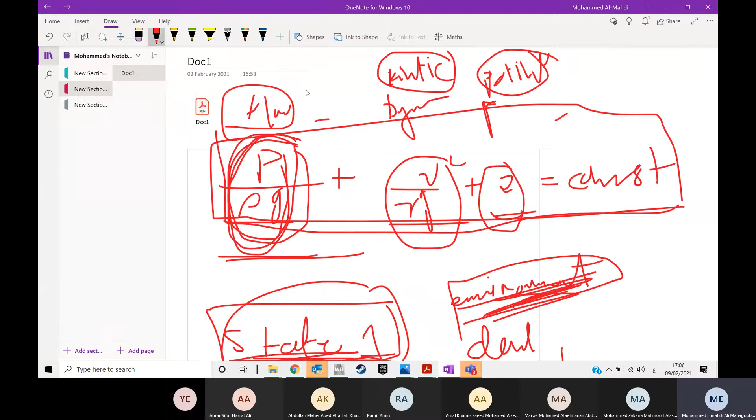Then in chapter 3, you learned about the phases and how to read the tables. You have the saturated liquid state, saturated mixture state, and saturated vapor state. And beyond these you have 2 states: the superheated state and the subcooled state, and you know how to get them from the tables. If you have a fixed temperature and the pressure is more than Psat, then you have a subcooled liquid. If it's less, you have a superheated state. If you fix the pressure, then it's the other way around with temperature. And if you have another property besides temperature or pressure, like enthalpy, entropy or internal energy, you can define if that state is in the saturated mixture region from the quality x.

Then in chapters 4 and 5, you took something very important, the closed system and open system devices. These you are going to see in every chapter from now till chapter 14. So what are some of the closed system devices? The rigid tank, and the piston cylinder device. In the rigid tank you have a constant volume, because it's a closed tank. In the piston cylinder device, the piston moves and gives boundary work, and it controls the pressure inside the chamber, so the pressure is constant. These are the closed devices you took.

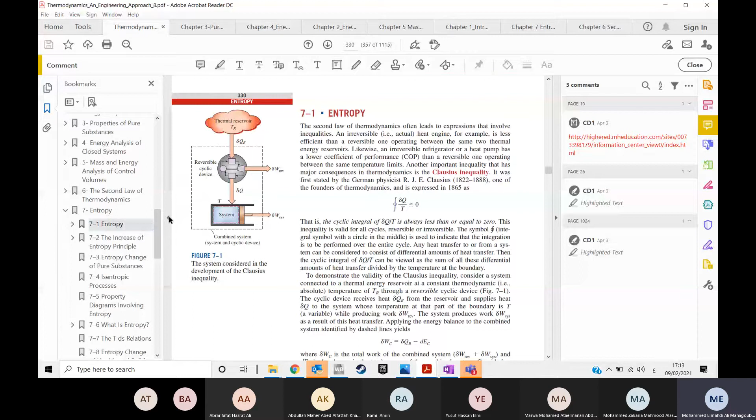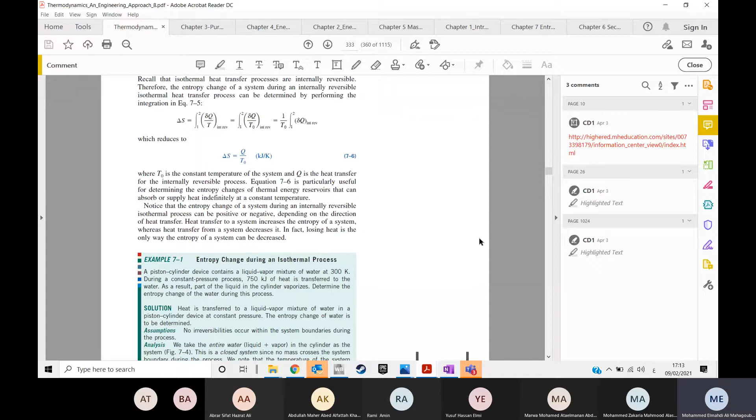So we have a piston cylinder device that contains a liquid vapor mixture of water at 300 Kelvin. During a constant pressure process, 750 kilojoules of heat is transferred to the water. As a result, part of the liquid in the cylinder vaporizes. Determine the entropy change of the water during this process. So we just want to calculate the entropy change of water in this simple process.

We don't have any mass in or mass out because obviously it's a closed system. And we don't have work, and even if we have work, it doesn't matter for entropy because we don't have entropy coming from work. So the only things that produce entropy are the heat and the mass, remember them.

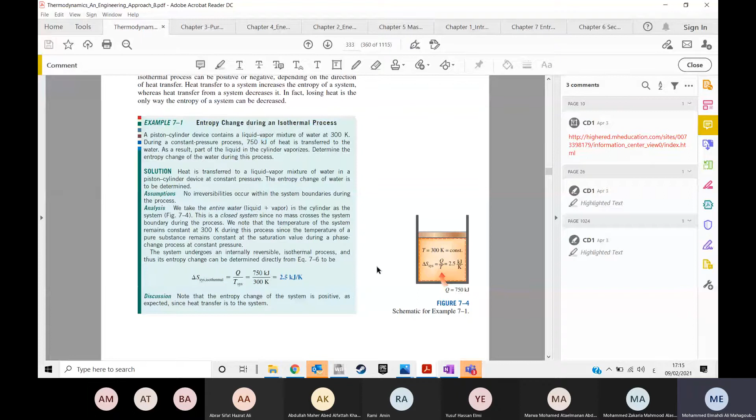So we only have this amount of heat transferred to the water, and we have the temperature of the boundary. Then the change of entropy will be Q over the temperature of the boundary, which is the same as the temperature of the system because it's at a constant temperature. Then 750 kilojoules over 300 kelvins will give us the change of entropy of that system. This is a very simple one.

Okay, this one is also related to it, just substitution of the equation of Q over T for the entropy coming from heat. We have a heat source at 800 Kelvin that loses 2000 kilojoules of heat to a sink at 500 Kelvin. This is the temperature of the sink, and this is the other temperature of the sink. So we have two temperatures for two different sinks. This is case A, and this is case B.

A heat source can be like a furnace or a boiler or anything, and these are the heat sinks where it's basically rejecting the heat that's coming from the source. So we want to know which heat transfer process is more irreversible. How can we define the irreversibility? The irreversibility was coming from this term that I talked about, the entropy generated. This is the entropy generated term.

But isn't there any difference between irreversibility and randomness? Irreversibilities and randomness. Now, the randomness or the motion of the molecules is related to the entropy, and if we have irreversibilities, they are part of the entropy, but they are not the whole thing. They are just some of it. You got me?

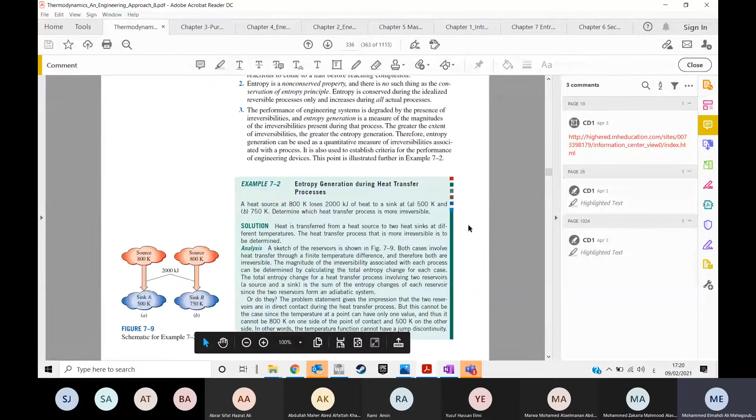For the sink, the heat will be in, so it's going to the boundary of the system. And for the source, the heat will be out. So here the heat will be negative and here the heat will be positive. Negative for the source and positive for the sink. And it's the same amount of heat, 2000 kilojoules, with different temperatures, of course.

Now compare those two systems with different sinks, the one with the 500 Kelvin sink and the one with the 750 Kelvin sink. Whichever has more entropy generated will be the one with more irreversibilities. We can know that without calculating, because this is a heat transfer problem, and the temperature is going from 800 Kelvin to 500 Kelvin. There are way more ways for the losses to happen from 800 to 500 Kelvin than from 800 to 750. And if you have this at 800, then you will not have any heat transfer, which means you have zero losses in this case.

So when we have a bigger gap between the temperature of the source and the temperature of the sink, we can expect, of course, more irreversibilities to happen and more entropy generated from our problem. But we just wanted to do it in the equation so that you get the hang of it. These are very easy. There is no mass, there is nothing, just heat. And you have only one system. It encloses everything, so you don't have entropy in or entropy out, just the generated entropy.

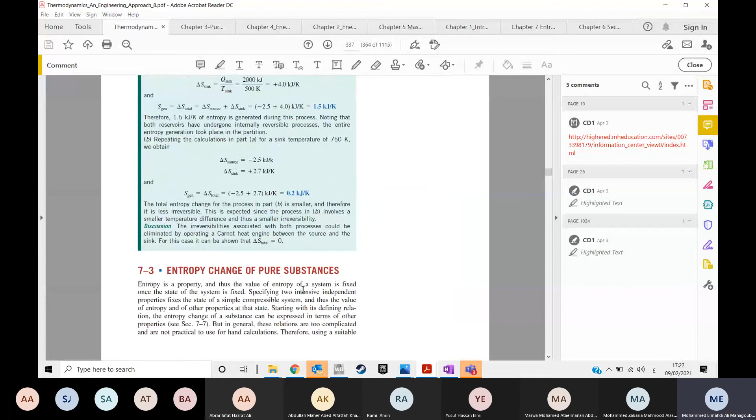Do you have any question till now? Okay. Yeah. Now we're having some systems, okay?

We have a rigid tank that contains 5 kilograms of refrigerant 134A. And this refrigerant is initially at 20 degrees Celsius and 140 kilopascals. The refrigerant is now cooled while being stirred until its pressure drops to 100 kilopascals. Determine the entropy change of the refrigerant during this process. So we want to know the entropy change of the refrigerant in this process.

Of course, we will always resort to our entropy balance equation. And remember, entropy is not like energy, so it's not conserved, okay? And it can be created or destroyed, okay? Or let's say can be created from the entropy generated. Entropy generated means that you are now creating some entropy that's not transferring from another source.

In the energy equation, you had the change of the energy of the system, and then the energy in minus the energy out. So we are not creating any energy, and we are not destroying any energy. If there is any energy lost from your system, then it's going to be lost to the surroundings, to anywhere else, but it's just changing its form, okay? And also there is no energy that's going to be destructed.

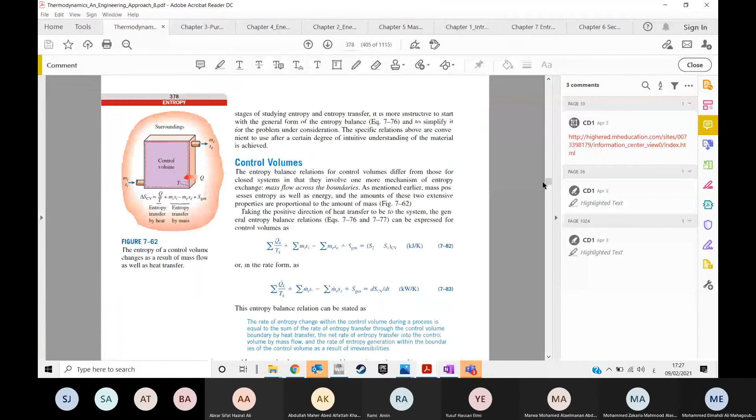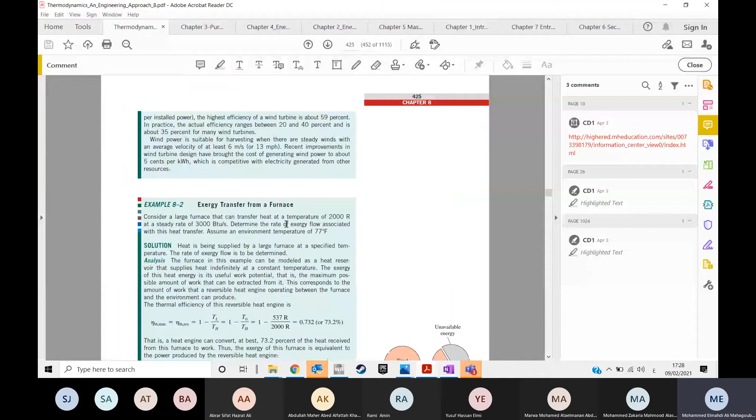So if you have mechanical energy, then this mechanical energy, or this kinetic energy, which is a form of the mechanical energy, will all be transferred to work, which is the same as the exergy. So here you just put equal to x. Okay, this amount of kinetic energy is the exergy that you have.

Okay, and this is the chart that I told you about. This is the total energy, and this is the exergy, which is the useful part, and this is the unavailable energy, the one that cannot be used in nature. Then if you don't have any losses, you don't have any exergy destructed. If you have some losses, maybe because you have other forms of work other than the mechanical energy, or heat transfer or any other irreversibilities, then you are going to have some exergy destructed.

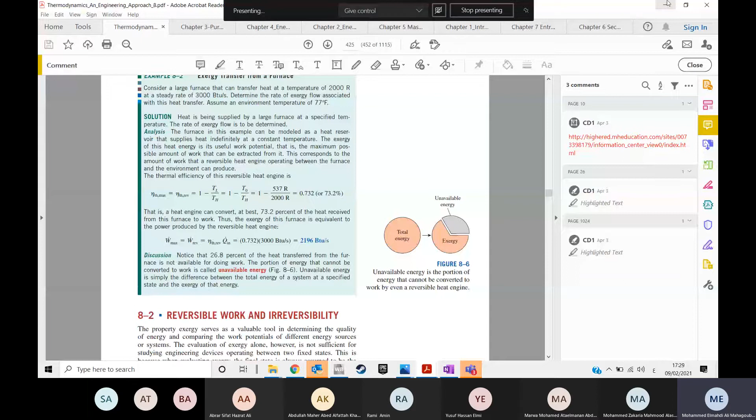So this is the difference between entropy and exergy. Entropy does not relate that much to work, but exergy is deeply involved in the work. When you reach that part, you are going to deal with the three equations. That's why it's important that you know everything so far, because some problems in exergy require solving from the beginning, and you have like three unknowns. You solve the first unknown from the energy equation, the second from the entropy equation, and then you go to the exergy equation. Not all problems, but some have this technique. Okay, let's go back.

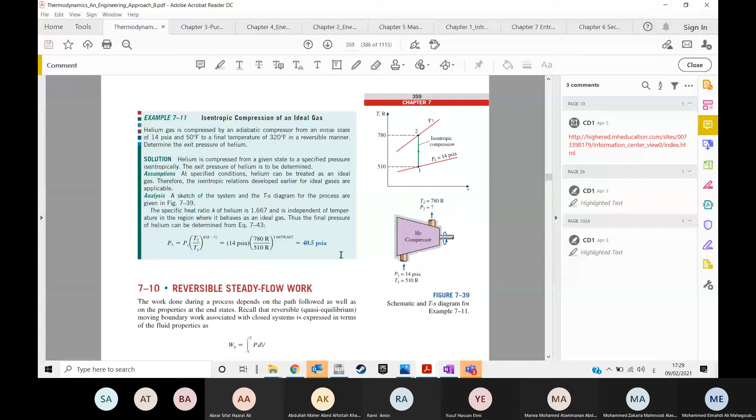Sorry guys if some of you feel like this is a bit boring, for those who maybe took entropy in thermodynamics, but I guess most of you didn't, so we are doing this part.

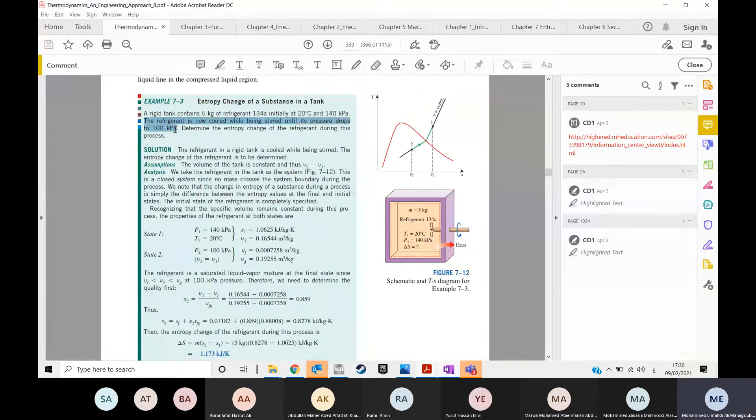Okay, now determine the entropy change of the refrigerant during this process. The change of entropy of the system, this is a closed system, equals the entropy in minus the entropy out plus the entropy generated. Will we have any entropy generated in this process? There is some kind of heat transfer. The refrigerant is cooled while being stirred until the pressure drops to 100 kilopascals. So you have some heat losses, then you are going to have entropy generated.

But you don't need to solve the problem from this side. You just solve it from this side because he is asking for the change of entropy in the system. If you have everything on this side, no need to go to the other side because there is an unknown there. Maybe you have the entropy in and the entropy out, but you don't have the generated part. So the change of entropy in the system is S1 minus S2 or S2 minus S1.

What was the first state? It's a refrigerant, so you grab the tables A11, A12, A13 that you have, and see what state you have at state 1. This is from chapter 3. And what state do you have at state 2? Then from that you can get the small s, the specific entropy, and say the change of the system equals the mass multiplied by the specific entropy of state 2 minus the specific entropy of state 1.

Of course, you can make it 1 minus 2 or 2 minus 1, depending on what change you are calculating, how it was and how it got to, or in the reversed order. Just be consistent. So at state 1, we have the pressure and the temperature. The entropy can be got from table A11.

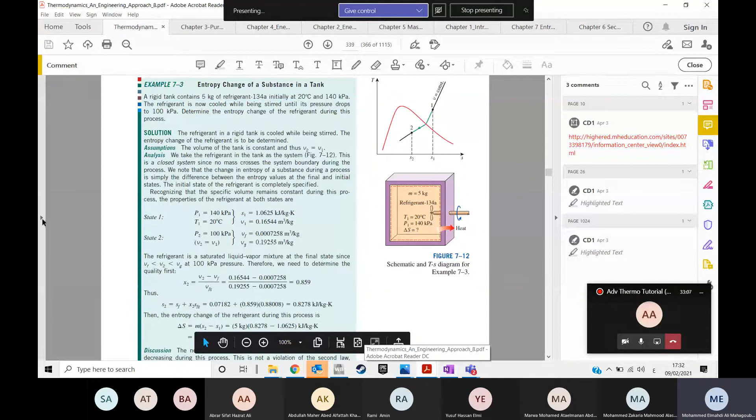Please keep the tables in front of you so that you can follow. I will try to open the tables. It's locked off. Okay, we can open it from here. Bookmarks.

Remember, we had 20 Celsius and 140 kilopascals. Is the pressure lower or higher than PSAT? It's lower than PSAT. So if our pressure is lower than PSAT and we fix the temperature, we know the state will be superheated, because the pressure is lower. So we go to table A13, to the pressure and temperature that we have, and get the specific entropy. This is, I guess, 1.0625. Okay, so let's go to the problem.

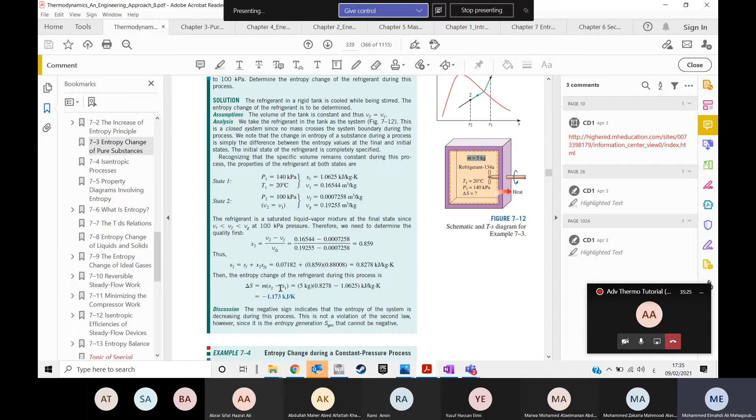Okay, so get the volume, and now fix the volume, because obviously you have a rigid tank, and then you can get the properties. Okay, it turned out to be a mixture, because it's between vf and vg. So now you can calculate x and therefore calculate s2. The mass of this system can be either given, or maybe you are asked to calculate it. If you have not a water or refrigerant system, but a gas system, then you can calculate the mass from the ideal gas equation. Okay, then that's the change of the entropy of your system.

I think it's simple. Do you get it? And obviously we didn't account for the shaft work because there is no entropy generated from work. Okay.

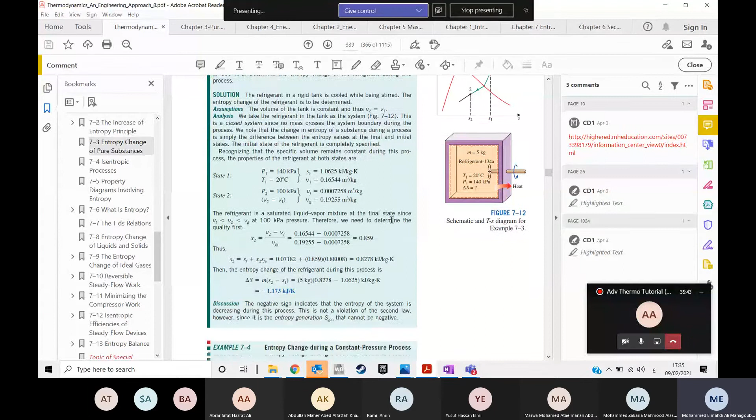The same thing will be applied to open systems. So this is an open system problem that we have. We have a steam turbine, and we are asked to calculate the output work of the turbine per unit mass of steam. Okay. Obviously, we cannot get the work directly from the entropy equation because there is no work in the entropy equation, only heats and masses. But what can we do in this problem?

We know from the statement that the steam enters an adiabatic turbine at 5 megapascals and 450 Celsius and leaves at a pressure of 1.4 megapascals. Determine the work output of the turbine per unit mass of steam if the process is reversible. When you see that the process is reversible and adiabatic at the same time, then it's isentropic. Why? If it's reversible, then you don't have any entropy generated. And if it's adiabatic, then you don't have any heat interaction.

Okay, so this is your system. When it's reversible, this means that you don't have any entropy generated. And when it's adiabatic, this means that you don't have any heat interaction, neither in nor out. I know that if you have heat, by definition, you are going to get entropy generated. But if you have both statements, then it's assuring you that you do have an isentropic problem. Okay, you will have the change of the entropy of the system equal to 0 when the problem says that it's reversible and adiabatic at the same time.

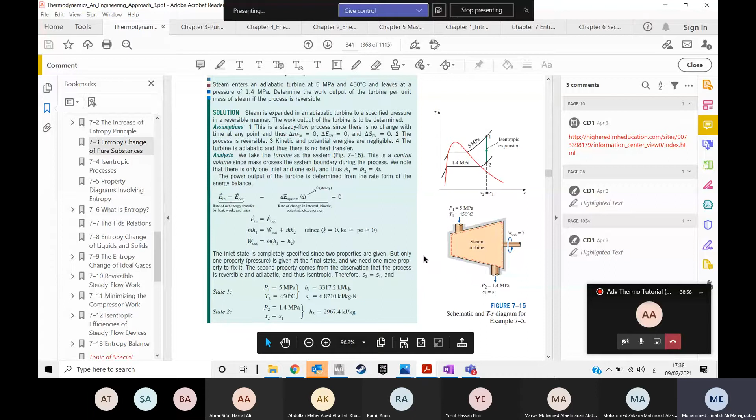And if I know the state at 2, then I can calculate the work out using the energy equation, not the entropy equation. You can use the exergy equation, but you're going to complicate it on yourself. The energy equation is easier. Okay. It's just direct substitution at the end. If you have S2, then you have H. You know that in open systems we go for H, not U, when dealing with energy. Then the difference in the H's is the work out per unit mass. If you have the mass, you can multiply by it to get the amount of work actually produced by the steam turbine.

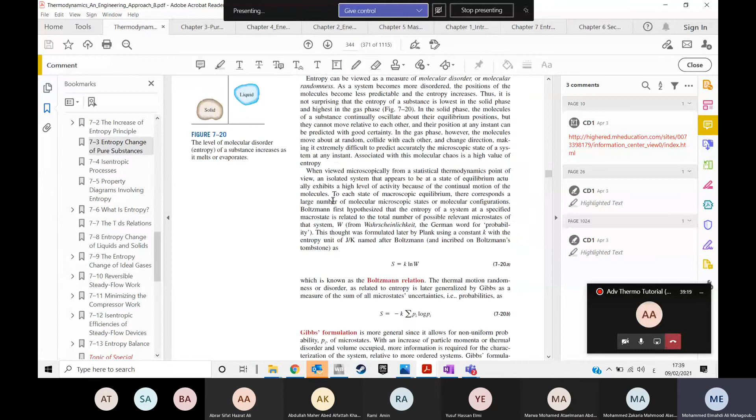Okay, I think we finished everything related to entropy, but there is also one small thing that I want to talk about, which is here. When you have a system of a gas, or mainly air, because we have tables for air.

Okay, so in this case, if you have air compressed by an adiabatic compressor, from 100 kilopascals and 12 Celsius to a pressure of 800 kilopascals at a steady rate of 0.2 kilograms per second. So he's giving us the flow rate. If the isentropic efficiency, okay, this is what's called the isentropic efficiency, and it determines how isentropic this compressor is.

So if the isentropic efficiency is 100%, then your compressor is isentropic, meaning that it operates at a constant entropy. See here in the TS diagram, this is state 1, and if your compressor is totally isentropic, then it will go from here to here, just raising the temperature and keeping the entropy constant. But obviously, in the actual operation, it will have some deviation from that constant entropy line. This deviation is accounted for in what's called the isentropic efficiency.

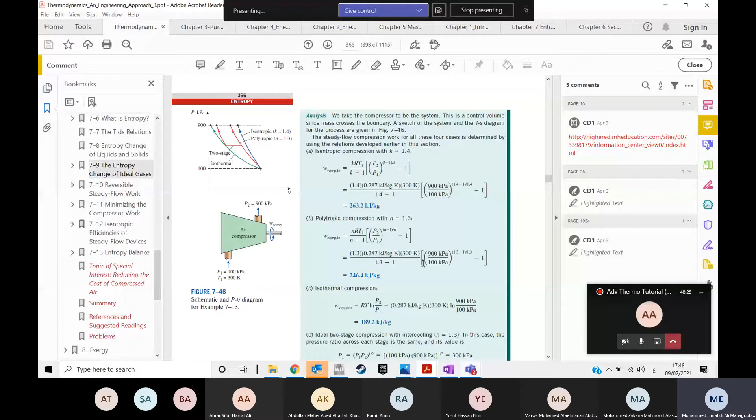Was it this? I think this was it. Okay, so don't see the isentropic efficiency. The problem. Sorry for that. Okay.

So we have the temperature, and from the temperature we can get the relative pressure 1, and we can arrange it in this way: the relative pressure 1 over the relative pressure 2 equals pressure 1 over pressure 2. This is the interesting thing that we can use when we are having an isentropic process. And the same thing goes for the relative volume relationships, okay? Relative volume 1 over relative volume 2 equals volume 1 over volume 2.

The same thing goes. But we are using pressure here because we do have the pressure ratios, pressure 1 and pressure 2. It's the amount of pressure raised by this compressor. When this compressor operates, it is going to increase the pressure of this stream of flow, and because of that increase in pressure, we have the pressure ratio or the pressure rise in this compressor. So that's why we use the relative pressures, not the relative volumes, okay?

Then we have the relative pressure at 1. We have pressure 1, pressure 2, but this one is the missing one. You can get it. And now after you get it, go back to the tables and use the relative pressure that you got to get the temperature and the enthalpy. Okay, so this is what's interesting in this table: if you have only one of these properties, you can get the rest.

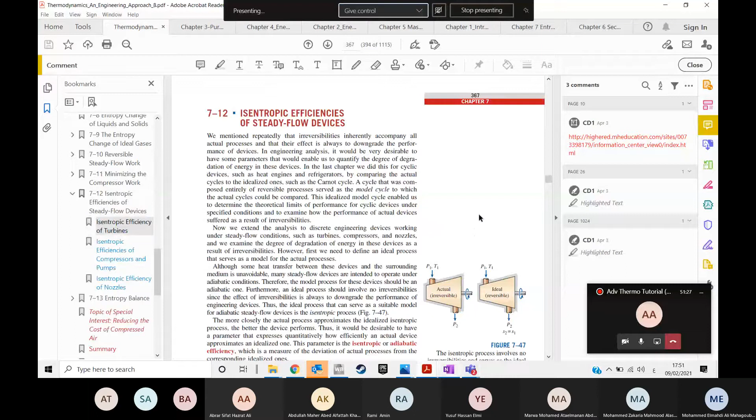So it's either that you know the relative pressure or the relative volume, but don't use them if you don't have an isentropic problem, only if you have an isentropic problem. And then you can get the temperature, the enthalpy, and everything else that it's asking you to do. Okay. Does anyone have any question?

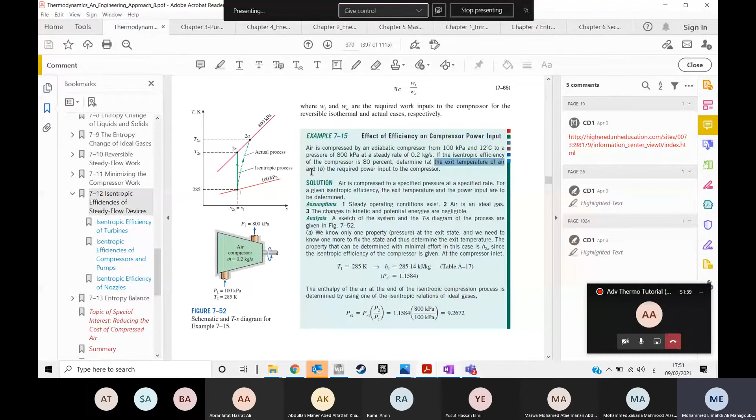Okay, so the exit temperature of air, which is T2, and the required power input will be calculated from here. 80%, as I told you before. H2S, this is the one that we calculated from the isentropic process. H2A is unknown. Then H1. This is known, this is known, this is known, this is the only unknown. If you get this one, then H2A minus H1 will be our actual work.

If he asks you to calculate the work, then it's always the actual work case. If he just says calculate the exit temperature of the stream, he means the actual temperature of the stream at the exit. Or if he says calculate the input work to the compressor, he means the actual work, not the isentropic one. The isentropic one is used along with the isentropic efficiency, which measures the performance of the device, to get the actual work.

So you have the efficiency, which is a measure of the performance of the device, and you have a way from the tables to get the maximum performance of the device. And when I'm telling you to calculate what work you will consume now, or what work you will produce now, it can be calculated by relating those two to each other.

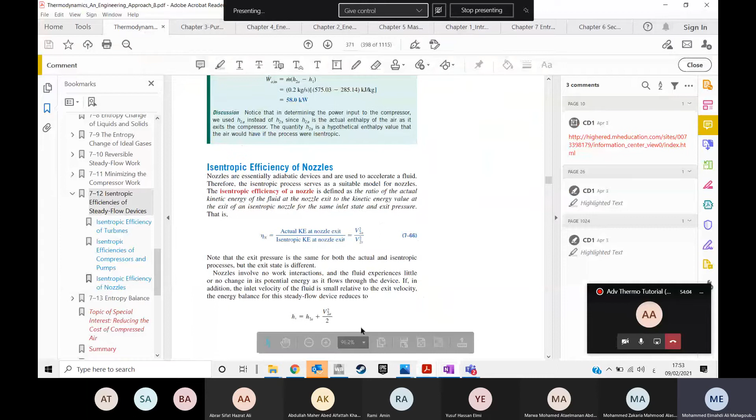So this is the only thing. If you have a nozzle, then it goes by the same principle. The only difference is that you have velocity ratios, because remember the nozzle device from chapter 5: in a nozzle device the kinetic energy becomes important, especially at the outlet, because you are converging the flow to have a very high velocity here.

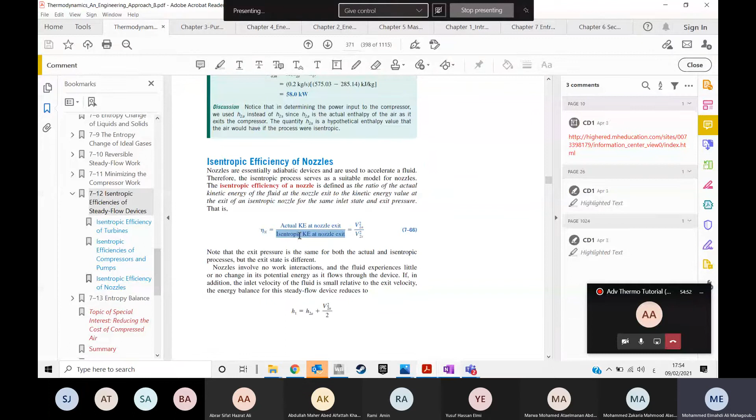When you reduce the diameter, you are going to have a higher velocity, which will lead to higher kinetic energy at the outlet. The pressure will drop in this case, but the kinetic energy will increase. So that's why you cannot ignore the kinetic energy in the nozzle. At the exit, look here, the actual kinetic energy at the exit and the isentropic kinetic energy at the exit, which is the maximum or ideal case of operation.

I think this covers everything. The entropy change of the system, in and out. You have the mechanisms of entropy. If you have heat transfer, then you are going to have Q over T. If you have work, then there is no entropy generated by work. And if you have mass flow, then it's going to be M times S, or M dot times S. And lastly, the entropy generated, which comes from the irreversibilities.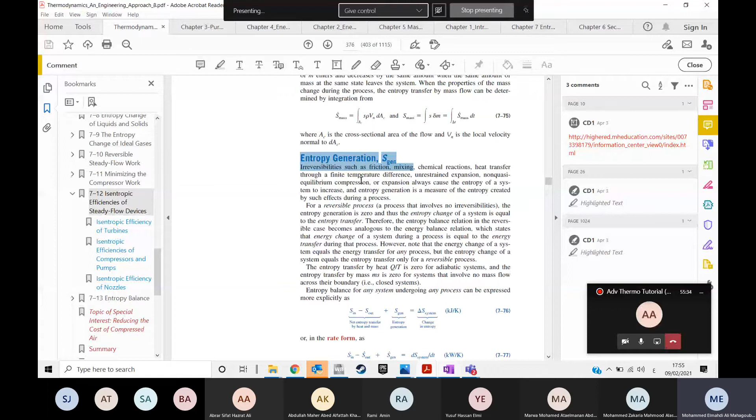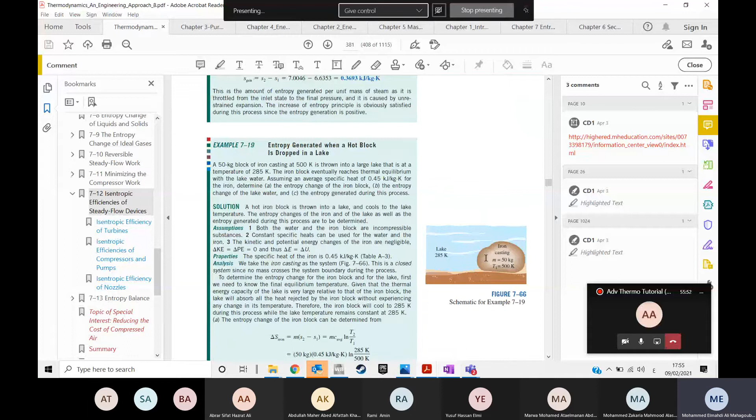Now that we have discussed this one, lake and iron. Yeah.

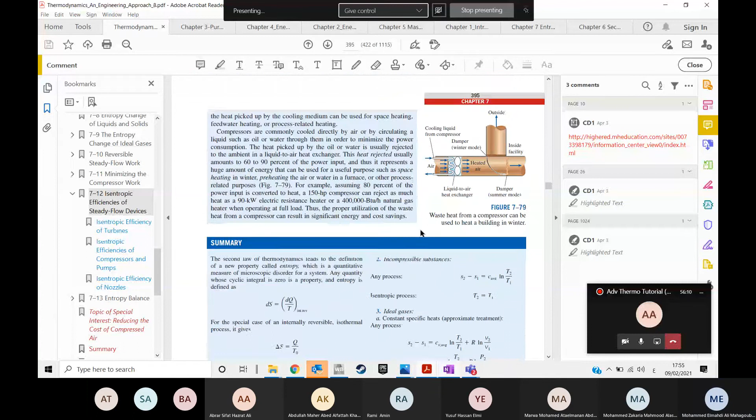There are equations for determining the entropy for incompressible materials, such as water or solids. Just look at them here. For an isentropic process, S equals S, of course. If you have an incompressible substance, liquids and solids, then this is the change of entropy. You don't have tables for these incompressible substances. Maybe for water you do, but other than that, you don't have tables or data. So you can use this equation. It's an approximate one. And if you have gases, then these are the two approximation equations.

If you want to capture the real effect that's happening, these do not account for the change of the specific heat with temperature. Specific heats always increase when we increase the temperature. So in these equations, we don't account for that. So here, this is a more exact treatment of the behavior that's happening there.

It depends on the relative entropy here, which relates to the third law of thermodynamics: at 0 Kelvin, we don't have any movement of the molecules of a perfectly crystalline material. So its entropy is going to be exactly 0. Not the change in the entropy, but the randomness of the molecules itself is going to be absolutely 0, because they are not moving, they cannot do anything at that state.

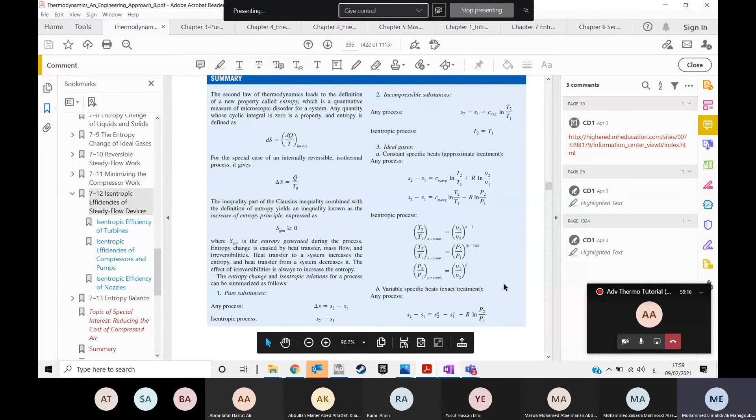So you have some data for them, you can look them up, substitute them here and get the change in the entropy. So this is the meaning of the relative entropy. It's relative to the zero state. And that pretty much sums up the whole chapter.

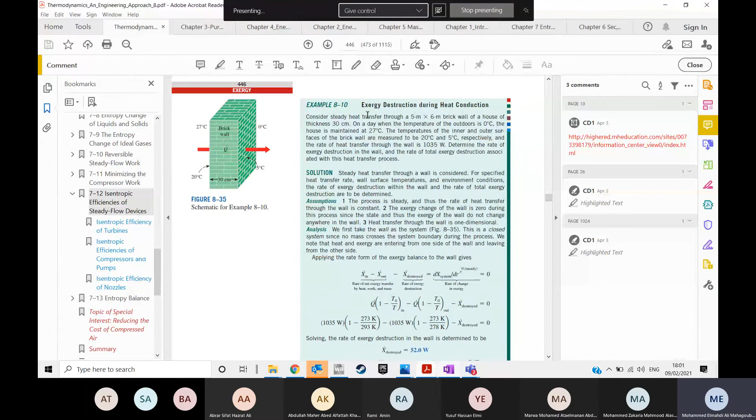I think we have to solve at least 1 or 2 problems on the exergy. For those of you who cannot continue, I will post the questions that I will solve. And for those who can continue with me, it's optional, of course. I'm going to solve 2 problems that involve everything related to the exergy chapter, and then I'm going to post the problems here in the chat, so if you want, you can look at them.

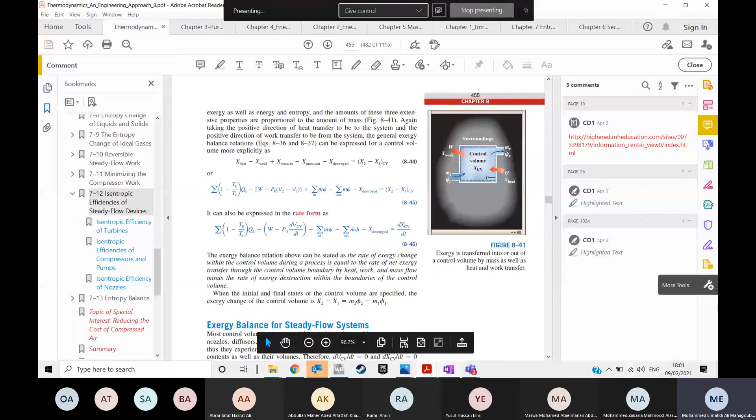One of the interesting problems that I found is this one of dropping a hot iron block into water. You have a 5 kilogram iron block initially at 350 Celsius, quenched in an insulated tank that contains 100 kilogram of water at 30 Celsius. Assuming the water that vaporizes during the process condenses back in the tank and the surroundings are at 20 Celsius and 100 kilopascal, determine the final equilibrium temperature, the exergy of the combined system at the initial and final states, and the wasted work potential during this process.

So before we start with this problem, there's something that relates the exergy destroyed to the entropy generated, which is this equation. Why is this term here? Because the exergy is a property not only of the system, but of the system and environment combination. If you are at the dead state, which is the state of the environment, you cannot produce work. To produce work from heat transfer, you need different temperatures, and with a flow, different pressures. We call it the dead state. So the exergy is related to the environment.

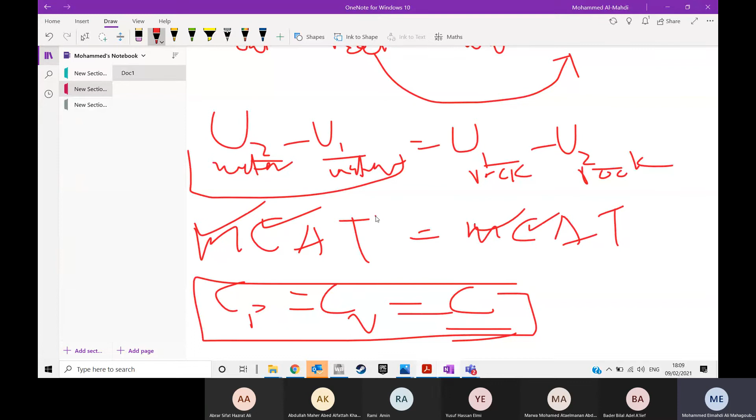MC delta T equal to MC delta T. Of course, here delta T is going to be reversed: 1 minus 2, here is 2 minus 1. And there is no CV or CP because these are incompressible materials, okay? So CP is equal to CV is equal to C, just C. We know the masses, we know the C values, and we want to calculate the final temperature. So here we put the final temperature.

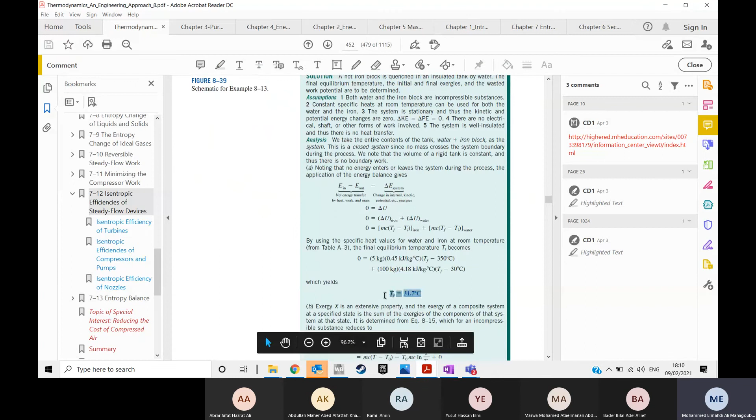Here the initial temperature of the water is known, which is 30 degrees Celsius. It doesn't matter if you put Celsius or Kelvin here because it's a difference relation. And here we have the same thing, just that we have the initial temperature, which is 350, minus the final temperature that we need, okay? Just calculate the final temperature and it's going to be 31.7.

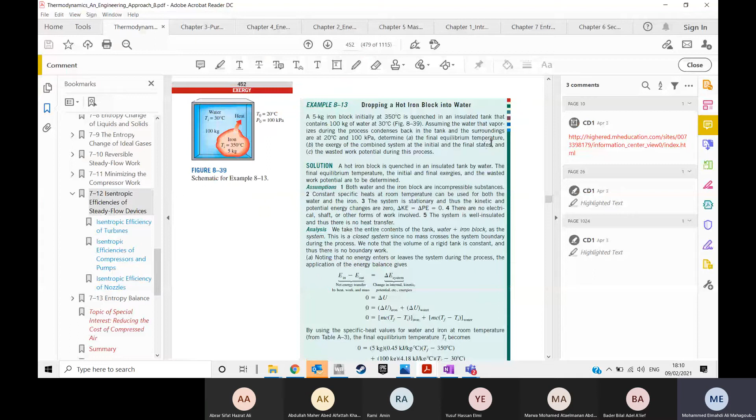Now for calculating the exergy of the combined system at the initial and the final states and the wasted work potential during this process, the exergy of the combined system is going to be the same steps that we did for the energy, except we are going to do it with exergy. So we want X2, which is equal to X2 of water plus X2 of the rock, and the same thing, X1, which translates to X1 of water plus X1 of the rock, okay?

In the exergy case, we can calculate the exergy for just X1 or X2 because the exergy is coupled with the environment. So when you say I want to calculate the exergy of the water at 2, you are comparing the state at 2 with relation to the environment, 0, okay? You know T naught and P naught. So just use the equation. I'm sorry I didn't introduce you to the equation, but it's nothing really. This is the equation of the exergy for a closed system.

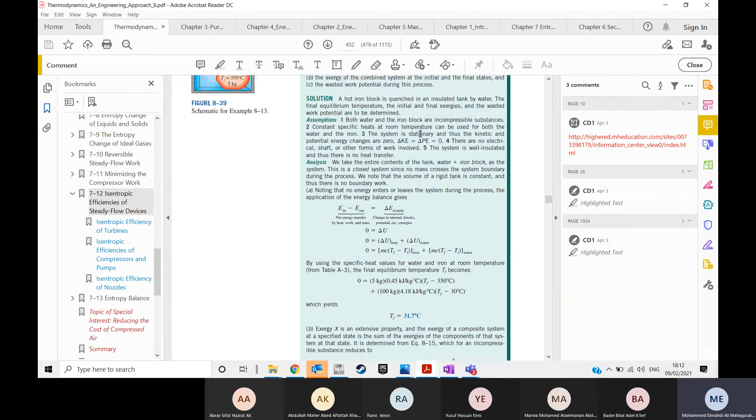Of course, you have MC times T minus T naught. So this is going to be T2 minus T naught. And this is T naught MC ln T over T naught. Then you are going to find the exergy 2 of the water and of the rock. And then 1 again, comparing it with the environment. And this is how you solve part B.

If you're going to solve part C, the wasted work potential is nothing other than the exergy destroyed. So use that same principle. The change of the exergy of the system is going to be the exergy destroyed, because we don't have exergy in, we don't have exergy out. It's just this isolated system; everything happens inside. We had X1 and X2 for everything, so just X2 minus X1 for water plus X2 minus X1 for the rock. Then you put this here and you'll find the exergy destroyed, okay? This was the question, I think.

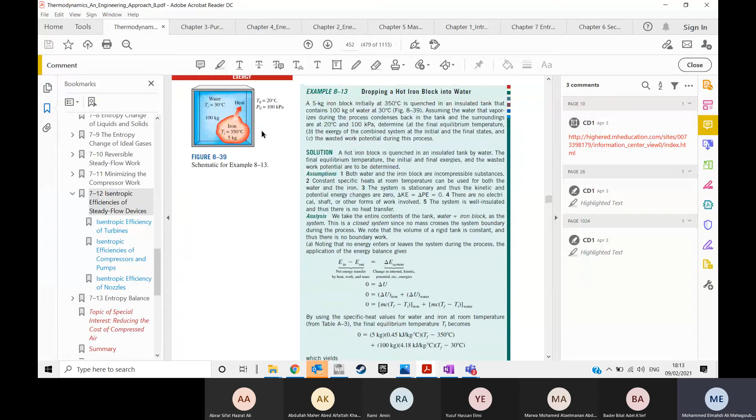So you see, it doesn't require anything. Just substitute and that's it. If you know which term you are going to use, if you defined your system correctly from the first time, then there's nothing hard to do after that. Okay.

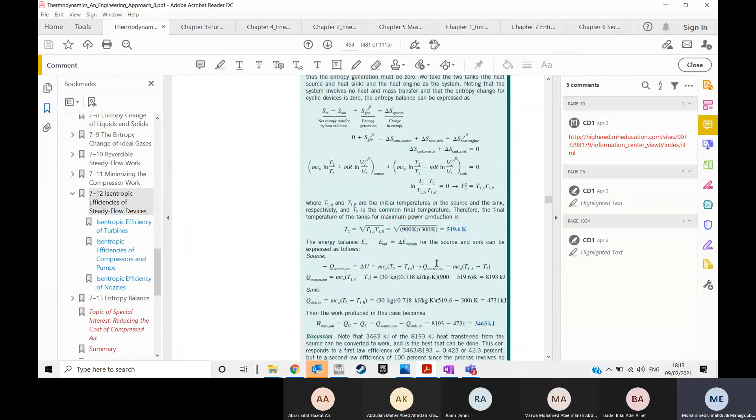Okay, but we still don't know if we have some value of Exergy destruction or not, so we have to solve this part using the energy equation, because it says the power input to the compressor. If you are solving with the Exergy equation, then you are going to calculate the useful work that you are going to extract. And you don't know if this power input to the compressor is the useful one or if there are some losses embedded in this power input.